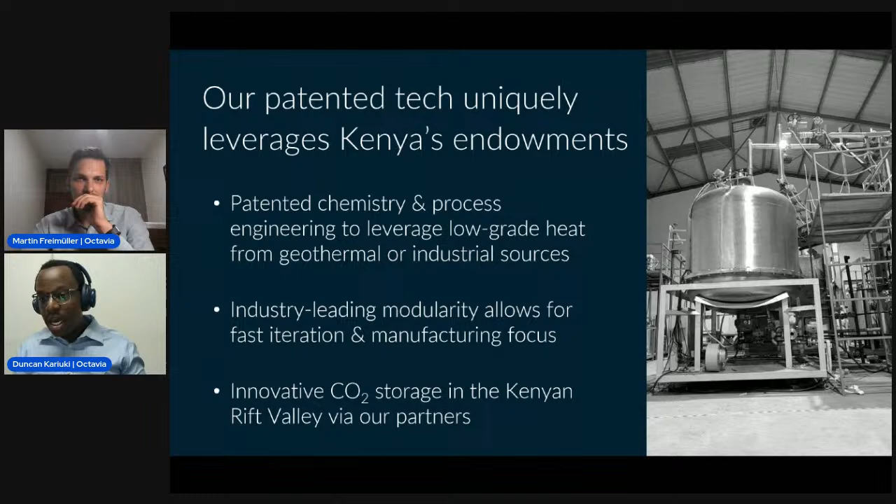But before we go into the field and some of the learnings we've had, in the next slide we'll see some of the iterations we've had in our technology. The thing to really stress here is that our DAC is really early-stage technology, and so it needs a lot of iteration to really focus on optimizing for both cost and operational efficiency.

So we've cycled through different designs, different materials, as you see here. What you're seeing is a manifestation of the different reactor designs and form factors to really operationalize DAC. We've taken all these different shapes, and each has taught us something new that has allowed us to improve the next unit.

We finally got to a steady state at some point last year and used that to deploy in a pilot plant as our Gen 1 technology, which we're going to see in a bit. And that takes the form factor of the cylinder, as you can see in the foreground here.

And that one is just really geared towards optimizing the operation of the process in a very safe and reliable way, particularly when thinking about dealing with vacuums.

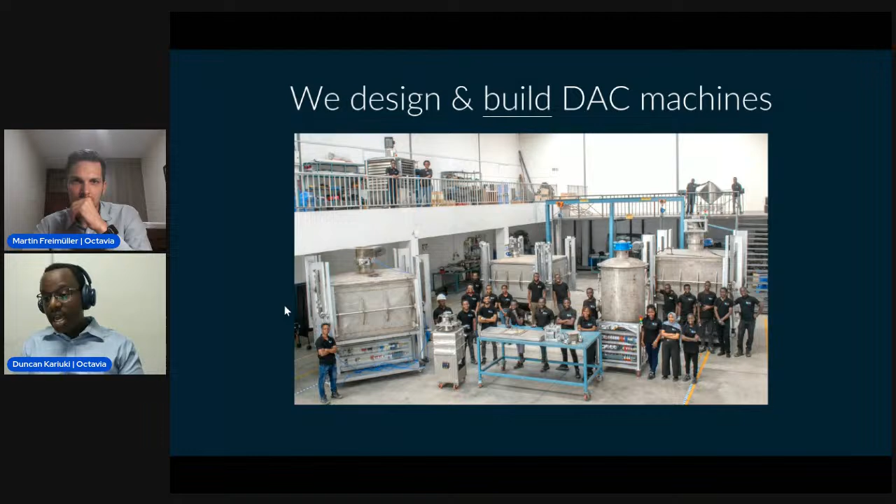So we'll now cycle through quickly in terms of discussing our journey on developing our project, or at least our pilot project. The primary objective was to get our technology out of the lab, out of development, and into the field where we can get real-world data, and at the same time validate the end-to-end process for developing a project as well as validating all of the costs.

So we started out the pilot plant construction in August. We relied on our storage partner for the site selection, and they selected an amazing site where there's plenty of access to geothermal energy, and very suitable geology for storage. It's quite an accessible site - we're essentially 3 miles from where their operations are located. We started out with a small scale plant, and started construction in August.

For this project, given that it was our first project in the field, we approached it more as a design build approach, where we did all the engineering designs internally. We worked with some external folks to review those designs, and then we subcontracted most of the construction, particularly the civil works and the electrical transmission. For the actual integration of our technology with its balance of plant, we did that ourselves. That is different from how you typically do a plant like this.

Given that this is a pilot project, we optimized for speed more than anything, and our ability to validate and bring a lot of the learnings with developing a project in-house. So the entire process took us about 6 months to get from design to final commissioning. We started the designs in June, commissioned the first reactor in November, and everything else was finally commissioned earlier this year at the start of January. So that's the construction phase of the project.

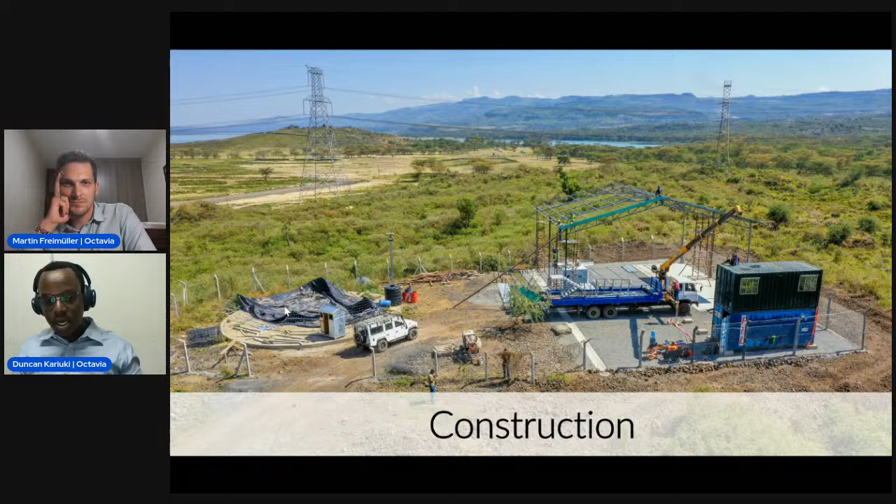There are many learnings that we'll walk through as we go through it. One of the other things we really wanted to do in this project is take learnings from other industries and transfer those into our own technology, because DAC, when deployed in a pilot plant, is really an infrastructure play.

So one of the things we really focused on doing is a lot of the balance of plant integration in-house as well, and breaking it down into a very modularized system. That was super helpful for us, as it allowed us to really minimize work on site. As we know, infrastructure projects face problems with cost overruns and timeline overruns if there's a lot of work to be done on site, because there are a lot of uncontrollable conditions there.

And we experienced that ourselves in the early days. So we worked to do a lot of that work in-house, a lot of the prefabrication in-house, as you'll see on the next slide. That also allowed us to do a lot of the testing in-house with our team, and front load a lot of the things that were first of a kind for us, or at least the first time doing a full balance of plant integration with our technology. That was super helpful, and it allowed us to front load a lot of these things.

There were some failures, and we'll discuss some of the challenges, especially with going through this design build approach, as well as choosing to do a lot of the work internally. It does present certain challenges, but I'll pause here and invite Martin in case there's anything he has to add before we go into the subsequent phases of the project.

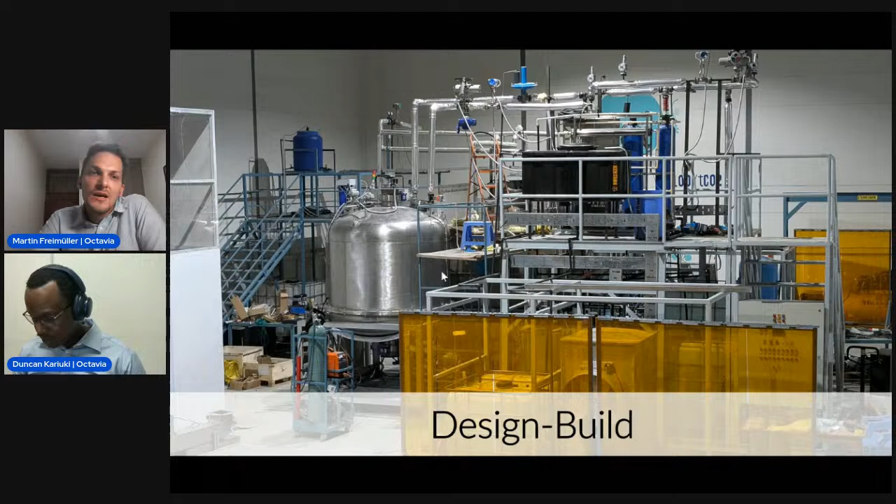Thank you. As Martin mentioned, one of the biggest learnings was dealing with different weather conditions on site. We're quite lucky in Kenya to have very stable weather throughout the year, but the place we selected had unimaginably high wind speeds that were moving very tall structures. Front-loading this allowed us to make modifications to the design of the plant and pivot very quickly on a lot of things.

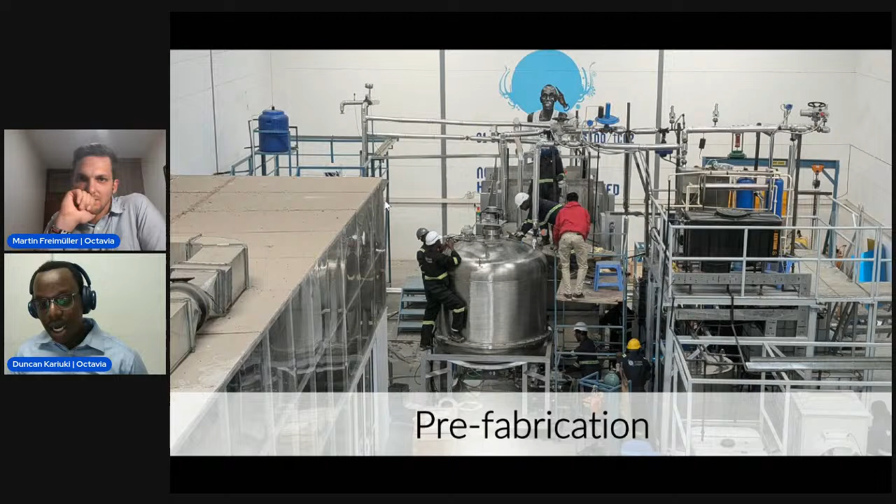So as we head to the next slide, we went from doing the prefabrication in-house, the assembly, all the pre-commissioning or cold commissioning as we call it internally, and then the next challenge was how do we get all of this to site, install everything, and do that relatively quickly.

The logistics of this whole process were quite challenging, particularly because it's a remote area, and the roads to get there are not tarmac, so it's a murram road with a lot of vibrations, which presented a lot of challenges for us on the equipment. We'd assemble something in our facility, get to site, and half the bolts would be gone, for example. That was a big challenge we had to overcome.

We recovered towards the end, especially with very sensitive equipment like our reactors, as you see here, and changed how we fabricate everything. That meant we also had to install or build specialized equipment just to support and hold the sensitive equipment, to be able to handle the logistics to that area.

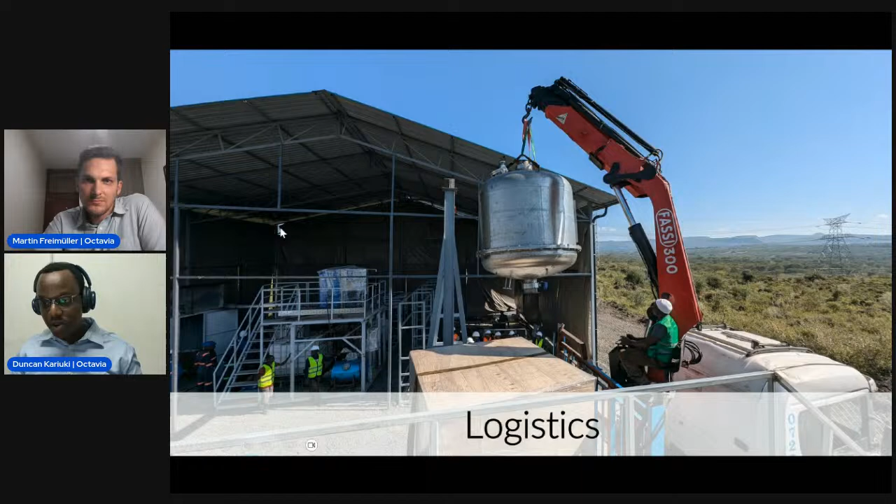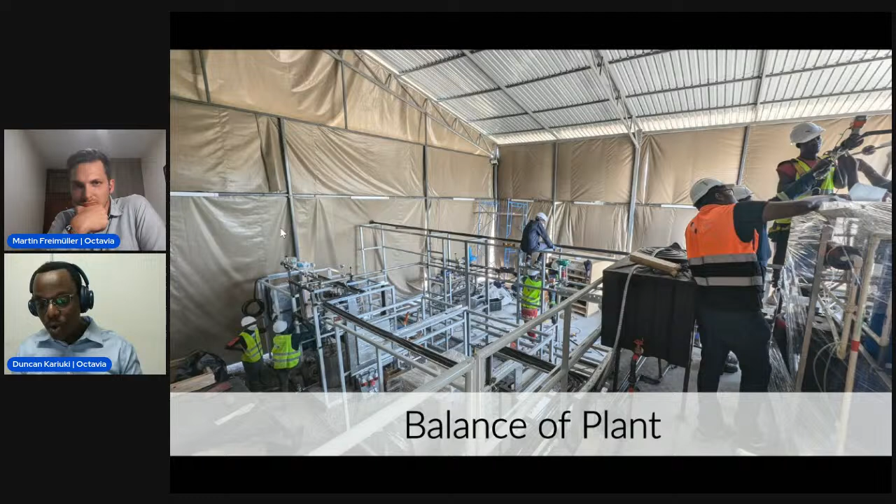Once we got there, we began the process of balance of plant integration, as you can see on the next slide. It's a very intense process because we're essentially working from different sections of the plant and then integrating these different sections to make them work with each other. Any one piece can go wrong and cause a problem in the commissioning step.

During the balance of plant integration, one of the things we learned when we did the cold commissioning in our manufacturing facility is that because of the speed at which we moved, there were areas where we ended up having failures, like wrongful termination of valves or instruments, and that caused a lot of delays in the commissioning process.

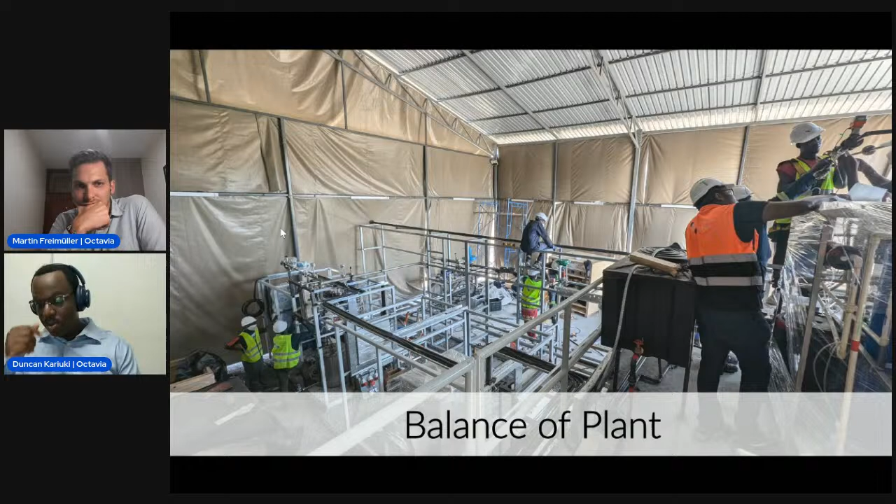One of the things we learned and took to the field when we started the balance of plant integration is to actually detail and document with a lot of rigor the entire installation, the entire quality control, and the commissioning processes. That really helped us, and we'll also discuss how one thing made a major difference in the field and helped us move much faster in commissioning.

All in all, installation and commissioning of everything took about 3 weeks, right from bringing the first piece of equipment to having the plant running. That included pressure testing and pressurizing all the lines and getting them into operating condition.

On the next slide, we start to get into the operations of the actual plant. One of the things we've also learned, and that has been a big challenge for us, is the repairs and maintenance of our technology in the field.

These are very heavy units, and initially, as we designed them, the reactors are on caster wheels, so they're designed to be able to move. One of the challenges we've found in maintaining high plant uptime is the amount of time it takes to disconnect a reactor from the plant, get it to a crane—we have a fixed crane there that allows us to maintain and open everything up—and then reconnect it back to the plant. That turnaround has typically taken us a long time, and we're working on ways of improving that, but it has been a challenge for plant uptime.

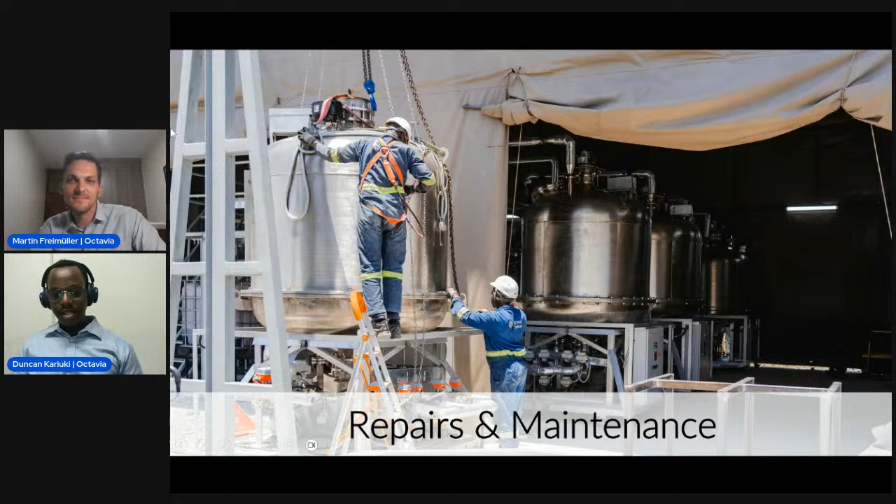Once we've gotten the plant to the field, assembled it, and commissioned it, we start operating it. There's the ramp-up phase, which is within the commissioning period, or when it ends, that we're actually in right now. In this phase, we're looking at getting the plant to its design capacity and to a level of consistency we need. For any large-scale plant, chemical or direct air capture, there will be that ramp-up phase.

This ramp-up phase is extremely important, as it's given us a lot of learnings in terms of how we design our technology and engineering. Our material science and R&D teams are also focused on getting those field learnings, like how our sorbent is performing in very humid conditions, getting up to 95% humidity at night. You've seen we are quite near a lake.

One of the biggest challenges we faced in the ramp-up phase, thankfully now mostly solved, was getting consistently high CO2 purities. The DAC process gets CO2 from a very low concentration of about 0.04%, and we want to get that to over 99% concentration so we can liquefy and store the CO2. If there's any leak anywhere in the system, we don't get that purity. We've had to work through weekends to eliminate all leakages in the system to get purities as high as possible.

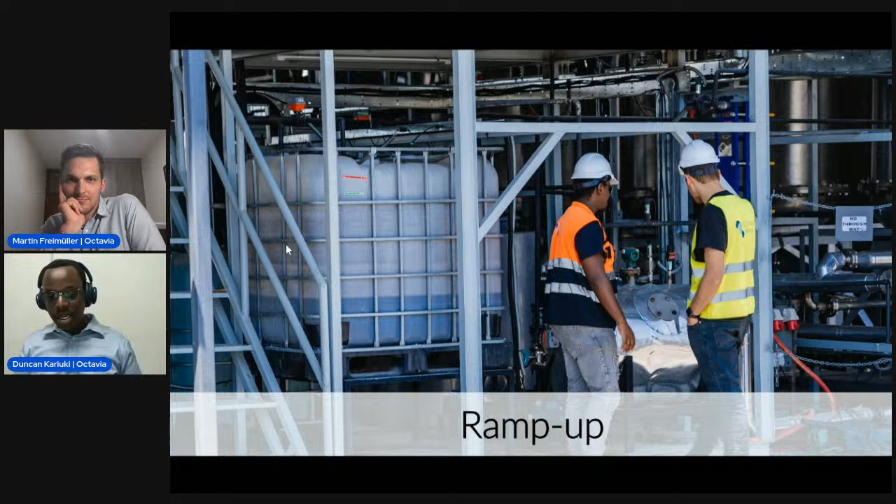One of the other things that was really important for us, both from a construction and operational standpoint, is occupational safety and health. We did have one minor incident during maintenance activities where one of my colleagues fell down and sprained his wrist. He's okay now, but in any construction project or plant, occupational safety and health matters, and we're lucky that one of our board members and investors has built large-scale facilities like this before, giving us a lot of guidance.

One of the proud successes of this project is the level of detail we took with safety. We have a daily safety briefing on site where we discuss any incidents and how we're learning from them. We've had that continuous learning approach for our facility. Even with the incident where my colleague sprained his wrist, we had a long discussion about it to see how we can improve our operations.

One of the other things that's pretty interesting and unique to this facility, as you'll see on the next slide, is we're in a very wildlife-rich area. We've had all manner of wildlife visiting us. During construction, as we were passing an underground cable and digging trenches, we uncovered a massive python from its trench.